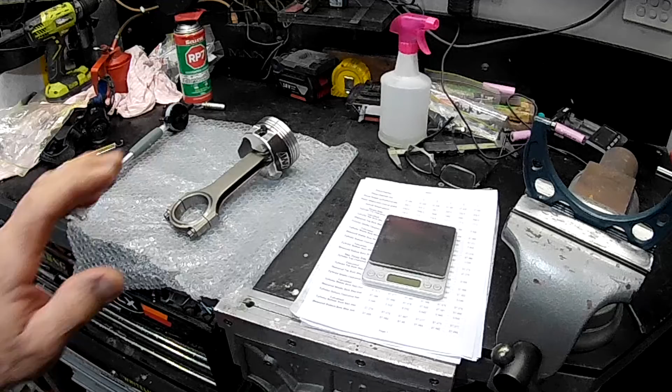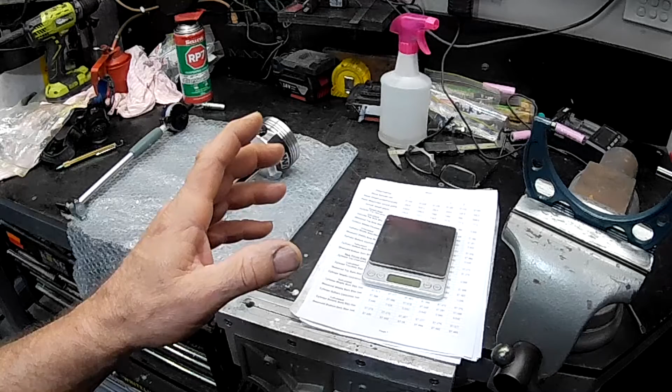Today I'd like to talk to you guys about measurements, specifically measurements you need to take in the engine block when embarking on a rebuild or refresh, which will help you know where you are with things, what parts you'll need, and how you'll progress with your rebuild. I'm going to show you how to draw yourself a map using numbers and calculations to get the exact size and shape of all your cylinder bores and pistons, work out the clearances, whether you can reuse your pistons, whether you need to get your engine rebored with new pistons, or whether you can just hone the block and fit new rings.

But to do any of that, you need to know all of that sizing and have a record of it. A lot of people don't bother doing this, they just hand it off to a machine shop and go in blind, saying 'oh, whatever you reckon.' But as I try to push people on my channel, it's all about learning, teaching yourself how to do stuff, even basic stuff. We've all got to start somewhere, and you can progress to more technical things later as you get more used to it. It's good to know exactly what's going on with what you're doing and where you're spending your money, and to formulate your own plans rather than relying on someone else to tell you what you need to do.

And to do all that, you need knowledge. And to get that knowledge, you need information. And this is where I come in. I'll show you guys how to do all this sort of stuff.

So with me particularly, with this engine that I've pulled out of the Fairlady, it was a used engine, supposedly low kilometres. It was a built motor that supposedly had a lot of money put into it. There are a lot of promises with this engine, and some of it I can't complain about, honestly. It's really not that bad. It certainly could be better, but it's certainly not the end of the world either.

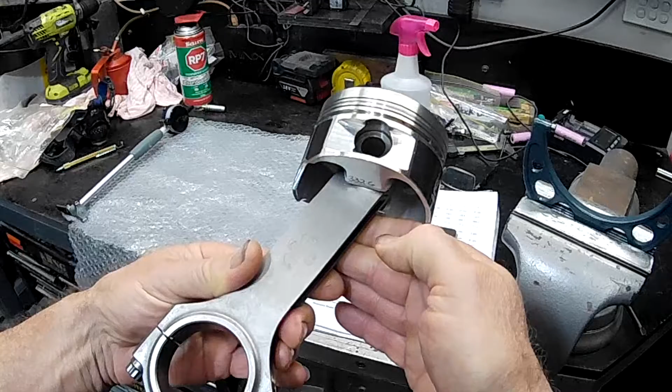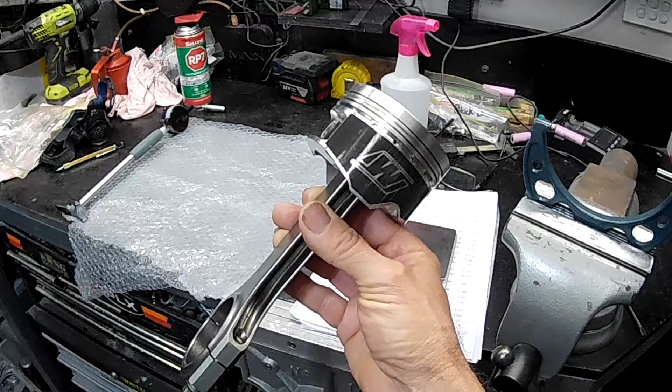So the first thing we need to do is know the size of our existing pistons. This is the piston and rod combination I pulled out of this engine. You can see they're Wiseco forged pistons, Eagle rods, a nice little unit, nice little setup. A rough measure of the cylinder bores tells me they're 87.5 mil, just taken with a set of vernier calipers. Standard bore size is 87, I think. So obviously the engine block's been bored, and these pistons bought for it and set up.

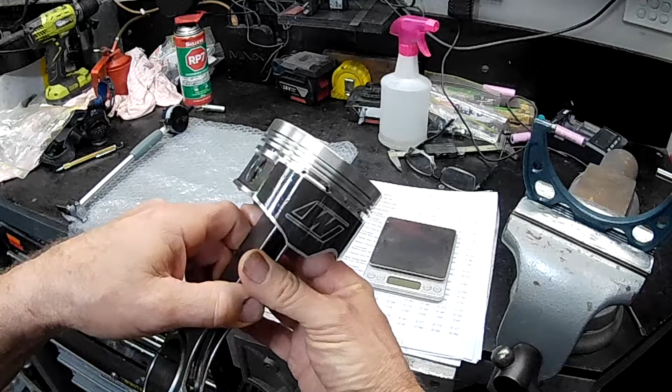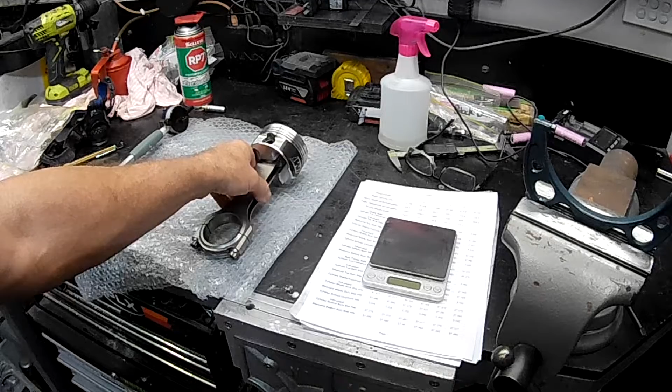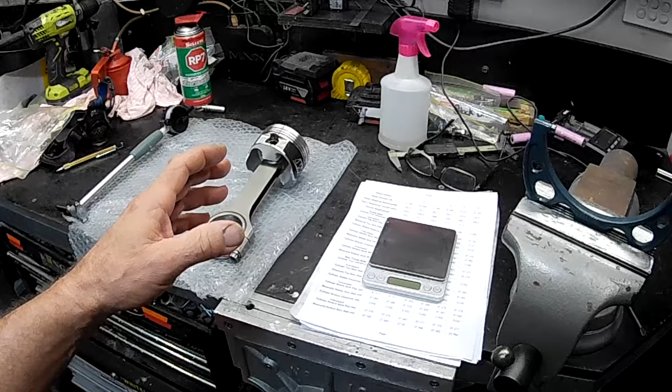But the engine has done some miles. From what I've been told, that's about 10,000 kilometres, but I don't really hold any faith in what I've been told, just because there's been so many anomalies with all the information I've received about this engine. Upon tearing the bottom end down, I did notice some very light scoring on some of the cylinder walls on the thrust sides of the cylinders on the banks. I'd like to be sure they can be honed out and that there's enough meat left in the cylinder walls to properly hone the block, get the right hone finish, and not open the block up too much. I've got a feeling the block is actually a bit tight anyway, but the only way I'm going to know is if I accurately measure everything.

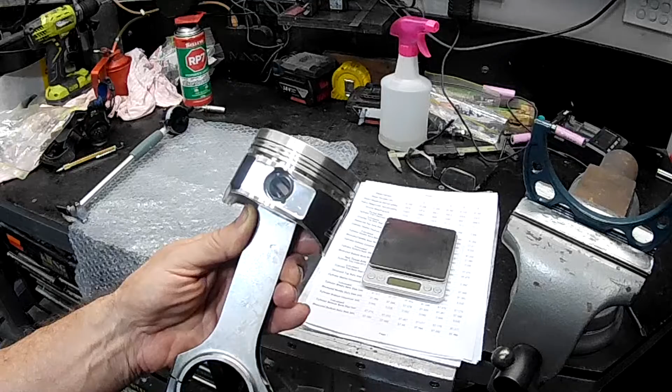So the first thing we have to do is measure our pistons that we've pulled out. As I say, these are for an 87.5mm bore, which is roughly what the bore measures with a set of verniers. But we need to know the exact size of these pistons, and we also need to know how much clearance the manufacturer specifies between the piston and the wall of the cylinder bores.

Now these Wiseco pistons, the manufacturer recommends that they are to be measured 90 degrees off the pin face. So here, on this lower area, right down there on either side - that's our width. Of course these pistons do taper out slightly at the bottom, and that's the width we use to make all of our calculations with.

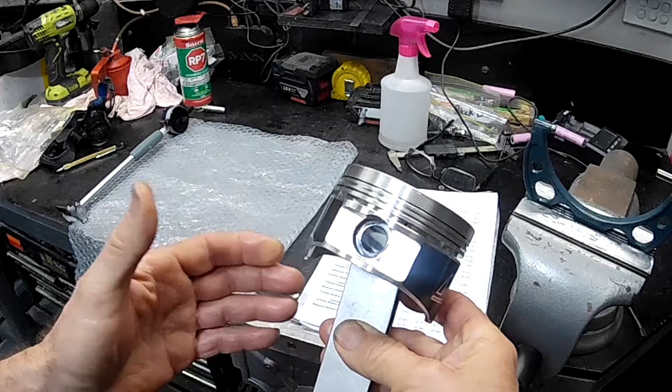So the very first thing we need to do is mark. See, this is piston number 1. We need to mark and measure all of the pistons so that we know exactly how big each piston is, because you can get some variation, particularly in factory pistons. I've already measured these pistons - they are all exactly the same, but for the purpose of this video I'll show you guys how we go about doing that.

So what I have over here in the vise is a micrometer. Now this is, I think, a 75 to 100 micrometer. Micrometers come in various sizes for measuring different things. This is only a fairly cheap micrometer. I have checked it to make sure that it is accurate. Currently it is accurate, but the measurement isn't really the important side of this anyway. You can actually use a micrometer with a broken dial if you want, I guess, because the measurement isn't the most accurate thing.

Obviously it's good to know, but really what we're going to be working out here is the clearance between the piston and the cylinder wall. But obviously it's good to know the working measurements. So this is how we go about doing this.

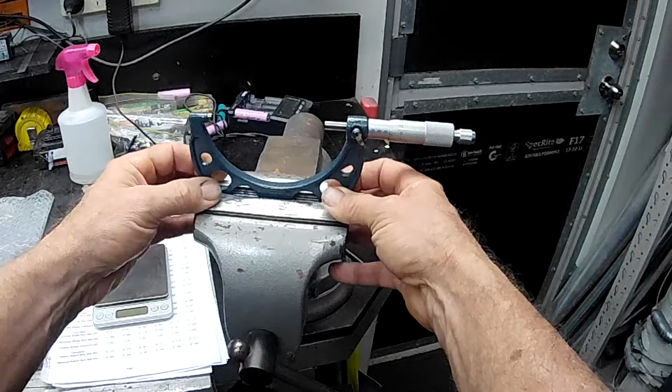So it's always good to mount your micrometer in something. Currently I have this micrometer mounted in a set of soft jaws, only very lightly in one of my vices. You have to be super light with these, because mounting it, you can actually distort the micrometer, distort your measurements, particularly with a cheap micrometer like this one. You have to be very, very careful.

Mount it just as lightly as possible, so that it's just going to stay there. I actually have a set of rubber jaws that I often use for things like this, but as I say, I am being very, very careful. And the reason for that is because you need to really take both hands to do this.

You need to control the piston, and you also need to be able to crank your micrometer. So when you use the micrometer, always use the ratchet. I'll just wind this up. They have a ratchet on the end - hear that? So that always gives you a consistent amount of pressure when you are turning the measuring part in, so you don't over torque things when you're doing it.

In a situation like this, it'll take a few goes before you've got it in the right spot. You've got to move it in and out, and try and get it situated as best as you can, so that you have it in a spot where it's firm, but yet you can move it in all directions so that you know you're in the right spot. Otherwise, if you don't have it situated correctly, it'll be either tight in there, you won't be able to move it around, or it'll be too loose.

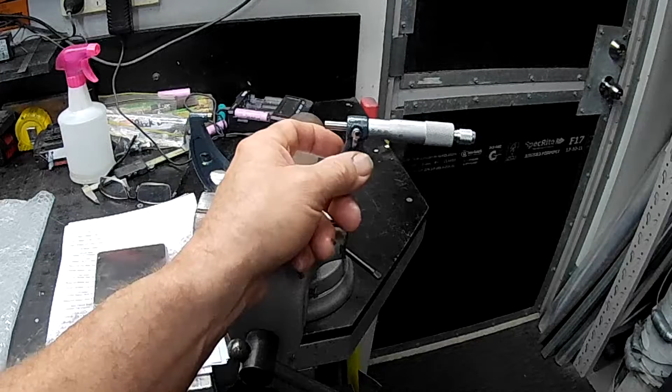Take your piston out, write the measurement down with the corresponding number of the piston, then move on to the next one. And once you have all 6 pistons done, you can then start the process of going through the cylinder bores. Now, all these pistons are exactly the same size - I've already measured them. They're all 87.435. So I can lock this off right now by turning the little handle that way, like so. Lock that off. And then we can move on to the next step.

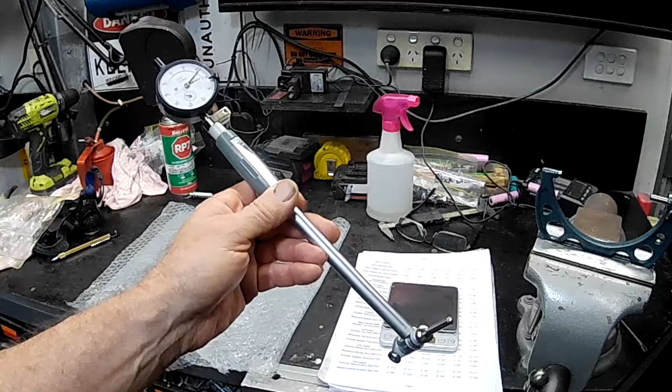So this is the next tool we'll be using, guys - this is a bore gauge. Now you can buy these pretty cheaply on eBay and Amazon. And what I'll do, I'll leave a link in the description to a bore gauge and a cheap set of micrometers, just to help you guys out.

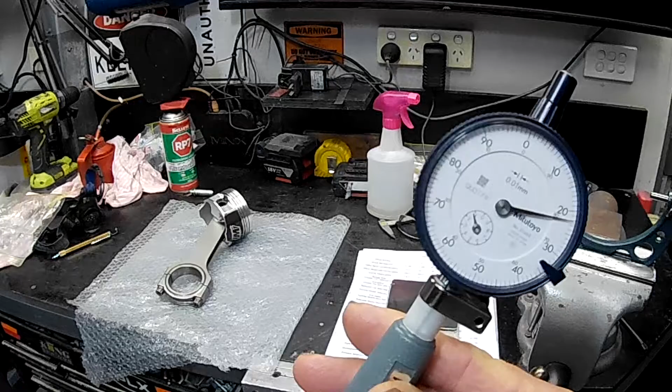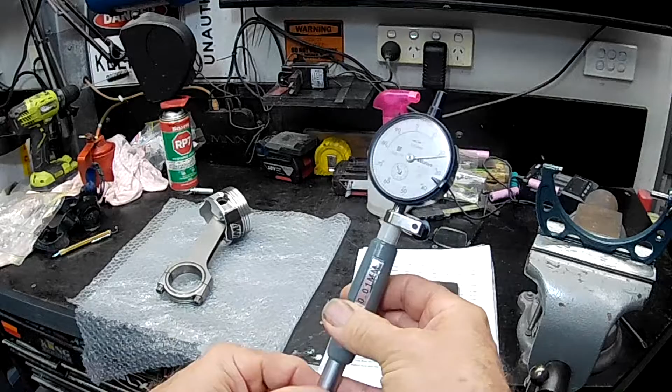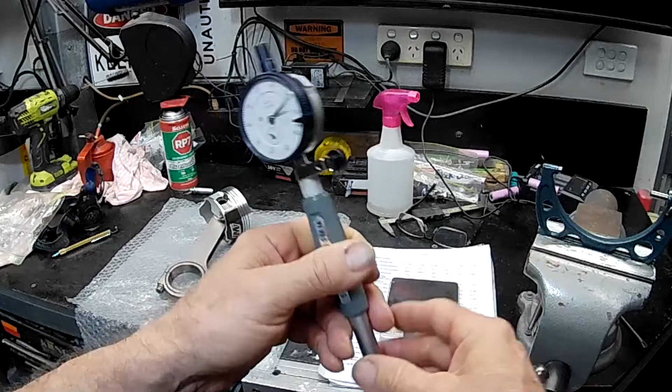So really they are the accuracy part of the whole setup. The bottom is just a pivoting thing that pushes the rod up into the dial indicator, and the dial indicator is where all the accuracy is. These things come with a pretty cheap and nasty dial indicator, so you can see I've got one of my Mitutoyo dial indicators on there. This thing is now incredibly accurate. It works really well because it's just a simple mechanical device. All the accuracy is in the dial indicator on top.

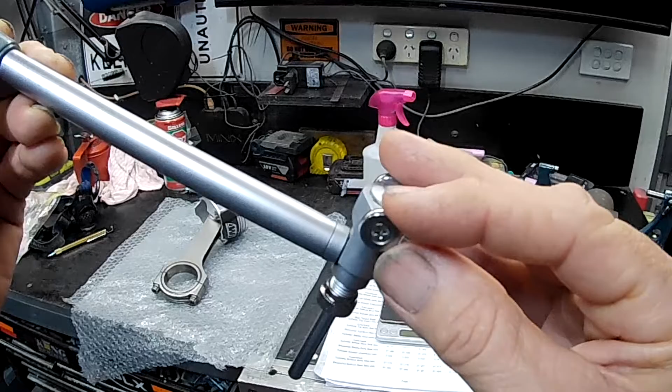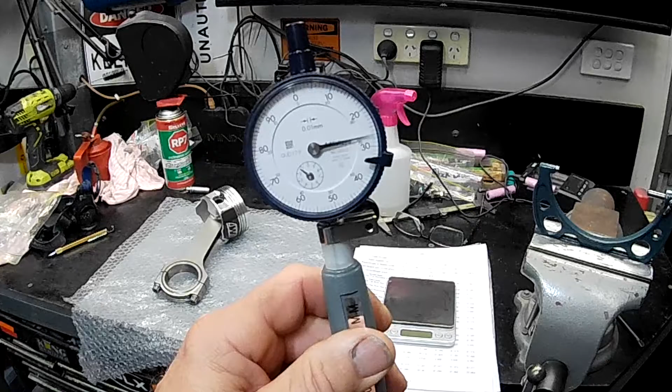These come with different attachments to work with different sizes. I think this set measures bore sizes from 50 to 160 mil. This is the piece on the back that makes it work, and it just pushes in and out - only a very little bit of movement, which is why you have these adjusters. These are little spacers that help position it properly in the bore so there's no wobbliness. I'll just push the bottom with my finger, and you can see what that does when I push that little button in.

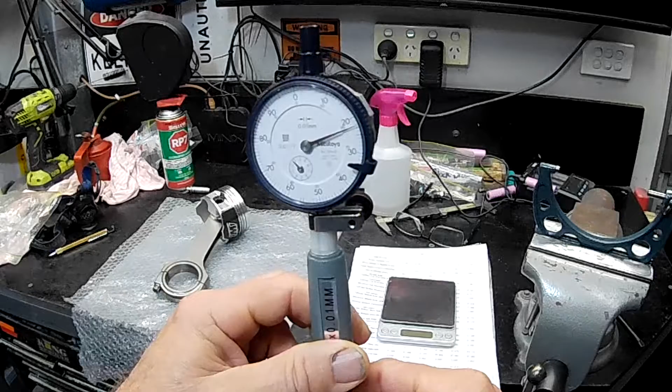It just moves the dial indicator. So as you move this into the bore and position it, it will give you the measurement of the cylinder bore. Okay, so how do we set this up?

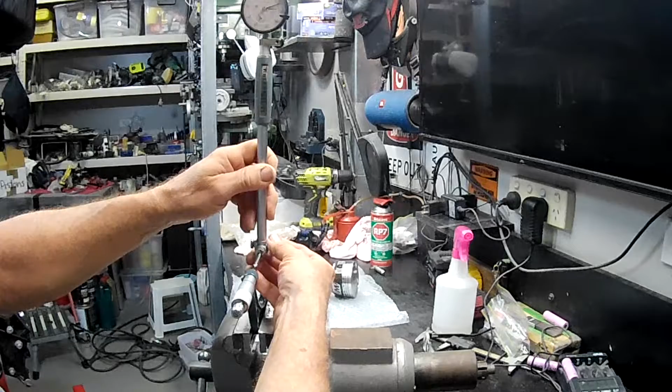Now that we've got our micrometer positioned over here in the vise, we use that to set up the dial indicator in the bore gauge. So with our micrometer positioned firmly, we now want to set up the bore gauge.

Now this takes a little bit of finesse, guys. This is a bit awkward for me because I have the camera right there - I can't bounce around like I normally would. So what you have to do, you can see as I'm moving this around, it's moving.

So what I generally do is set the dial gauge onto 0, double check by making sure this is positioned exactly on the anvils, and then just go up and down. You can see I'm getting a little bit of movement there - it'll peak and then go back the other way. So take a while doing this, guys. This kind of stuff takes lots of time because you are working with really high accuracy, so don't be afraid to take your time. It's all about chilling out, just taking time and getting this right.

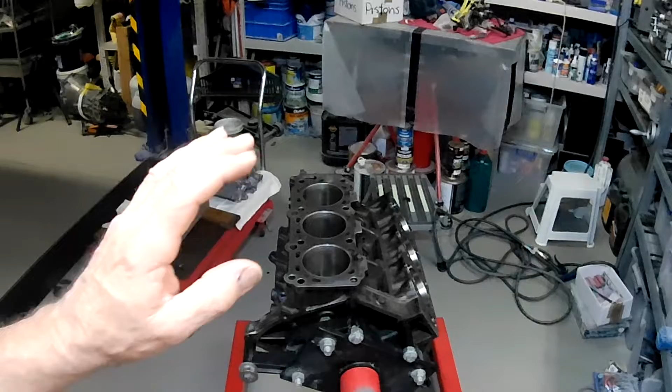So I'm pretty confident that I have my bore gauge now set to 0 on the micrometer. Alright, we can now take that off there. I'll just put this down over here for a second, carefully, so we don't disturb it. We have to be very careful with everything. And sitting just over here is our cylinder block.

So with each cylinder we need to take 6 measurements. What we're working with is measurements that are 90 degrees to each other. We need to take measurements across the cylinder bore in 3 positions: at the top, about 10 mil down just below the ring height, the center of the bore, and the bottom of the bore, just where the ring wear stops, just below that or just above that, or right on it.

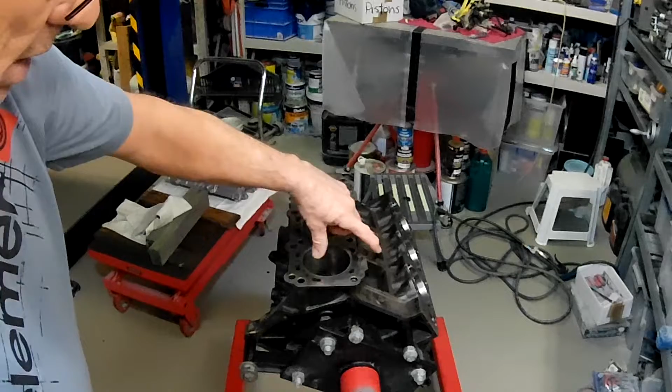Depends on where you want to take it. So you want to take 3 measurements down that way, and that's called the thrust side, because your crankshaft spins this way, so you've got thrust acting on your pistons, which are then acting on your cylinder bore. Then you've got 90 degrees off that, which is the non-thrust direction, forwards and backwards with the engine - there is no thrust in that way. So you've got thrust and non-thrust. You also want to take 3 measurements in the non-thrust direction: top, middle, and bottom. And you need to write all of those measurements down.

Personally, for myself, I actually take another 6 set of measurements as well, from a different perspective. So I'll show you my sheet that I've knocked up over here on the computer - it's just a spreadsheet I've put together, but I'll give you a look at that.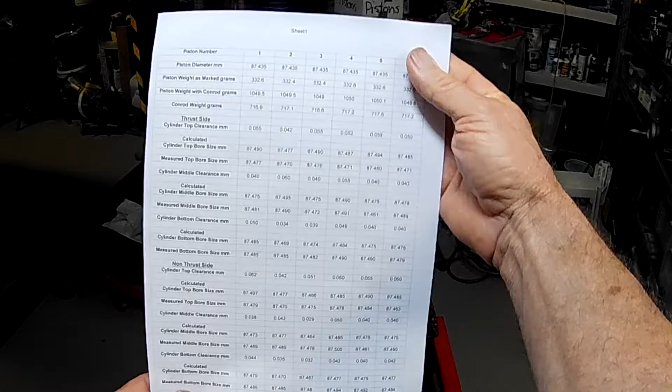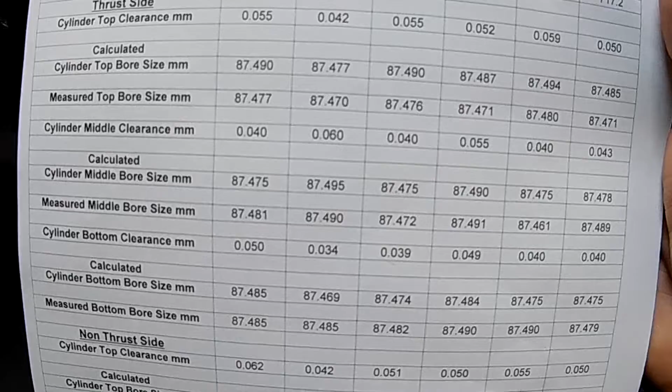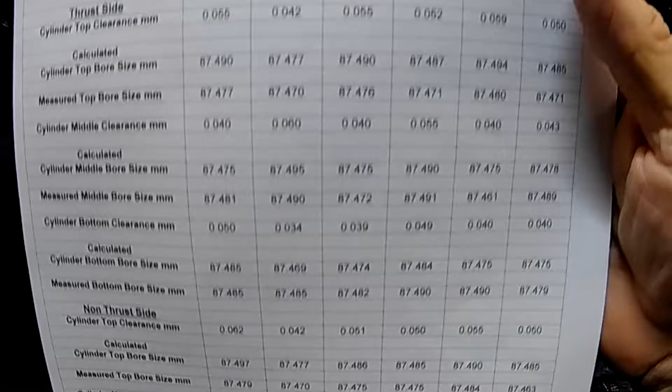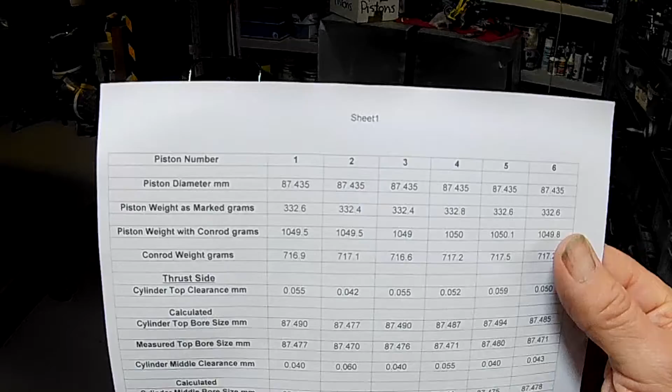Alright, so I don't know if you guys can see that - oh, I reckon you probably can. Coming closer so you can stop it and pause it if you want, and I'll scroll up slowly so you can see everything that's on there. Alright, so this sheet gives me a full map of the pistons and bore sizes that I currently am working on this engine. I also have here the weights, because I have been weighing the pistons as I do them. You probably saw there is a little scale sitting over here on the bench.

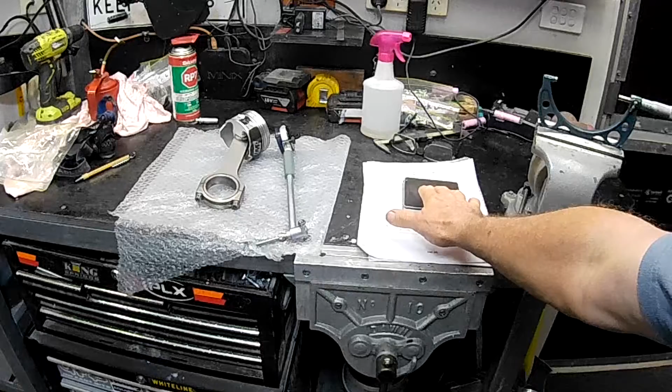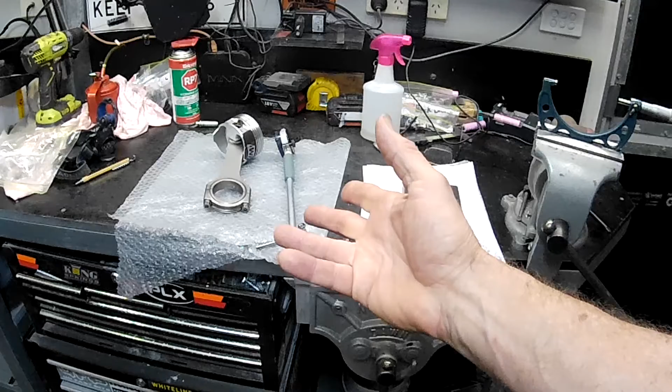So each piston and rod combination gets weighed as I'm doing them. Normally you'd weigh the pistons and rods separately, but they're already attached together. The pistons have markings on them from the factory, I think, or from the previous engine build, which has the weight of each piston. So I can easily get the weight of the piston from the markings, get a total weight with a scale, do a calculation, get the weight of the rod, and check how well the piston and rod assemblies were put together as far as balancing goes, and how well they're matched. So you'll see here what I've done.

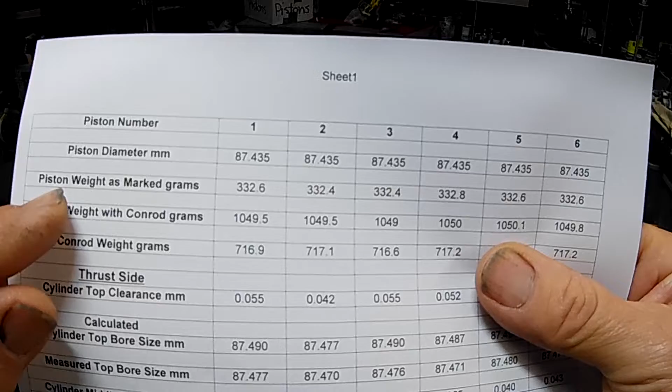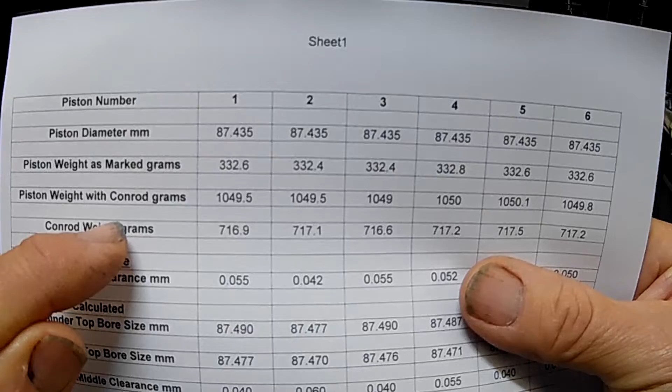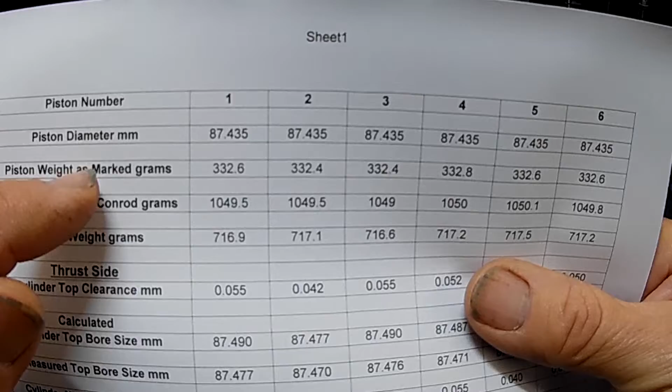So here you can see I've got piston weight as marked in grams, 1 through 6. Piston weight with conrod in grams down here, 1 through 6, and then I've got conrod weight in grams. That's just a calculation of the overall weight minus the weight that's marked on the pistons. That tells me how well they were put together, and if there are any improvements to be made by swapping any of the rods around.

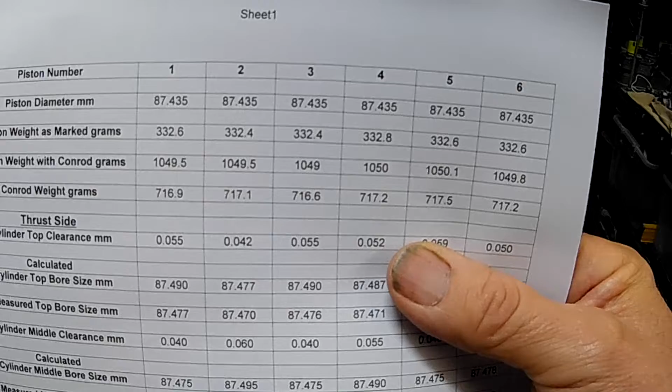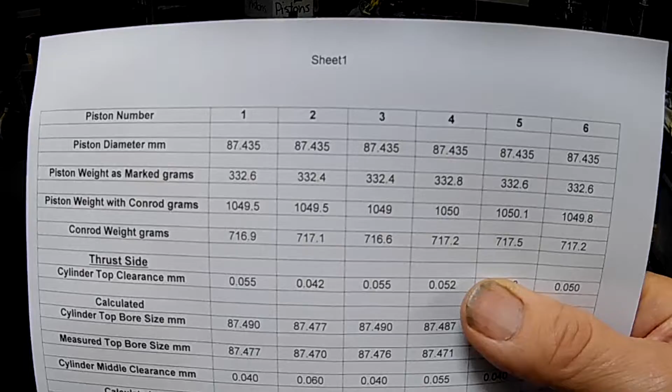Normally you'd do that with the components individually, but in this situation they're already together. So that's just what I've got while I'm here. I may actually separate them and reweigh them later on in the stage, but for now that's all I'm doing with them. So you can see the measurements that I've got here.

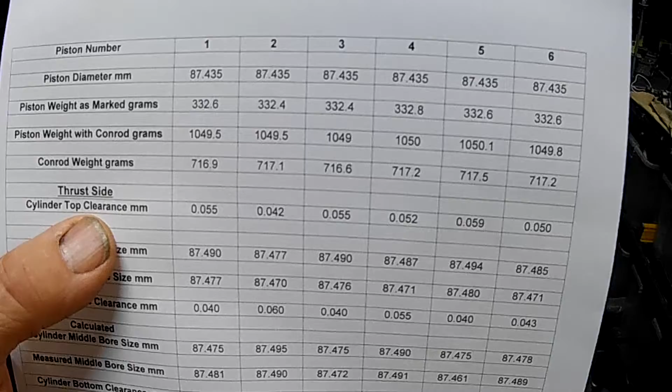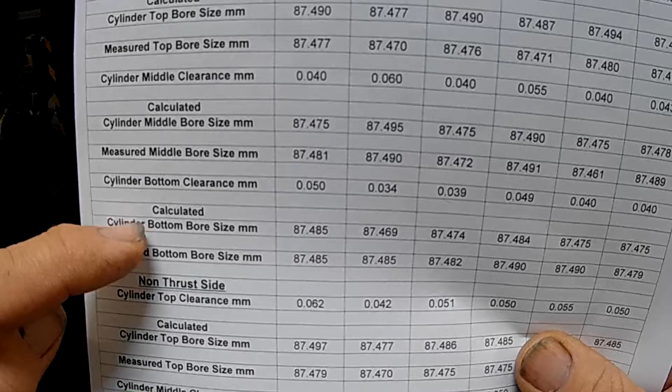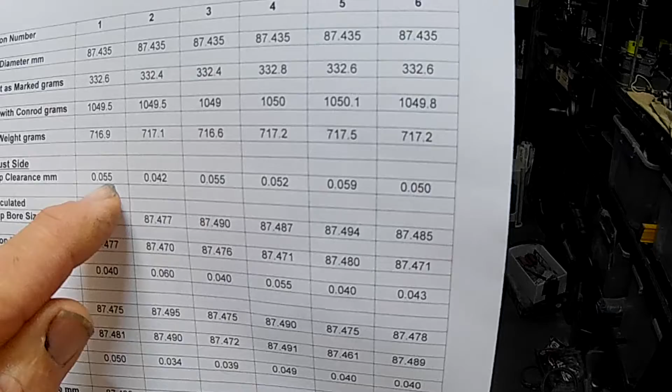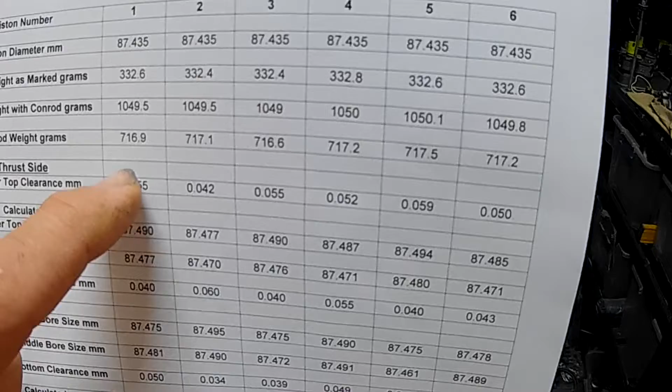So this first line here, obviously I've started measuring on the thrust side. My thrust side measurements go all the way down to here where we say non-thrust side. So this is cylinders 1 through 6 on the thrust side, and these are the measurements that have been made. We have cylinder top clearance in millimeters for each piston or each cylinder. Then we have the calculated cylinder top bore size. That number is achieved by adding this amount to our piston diameter, which gives me the cylinder bore size in millimeters in that position.

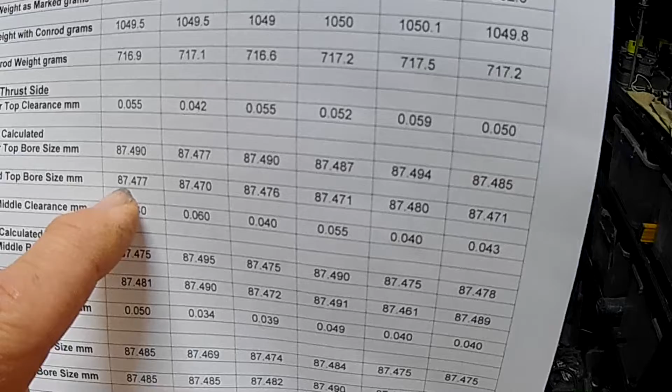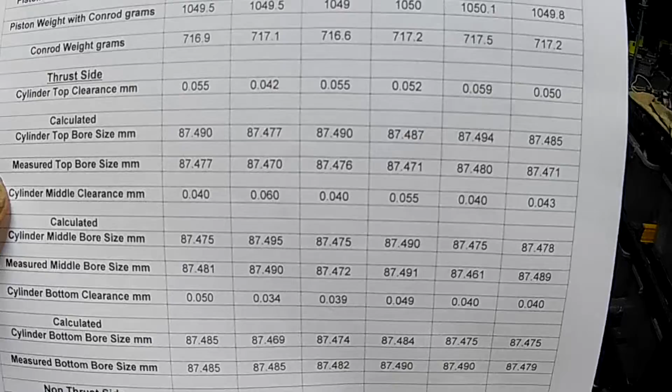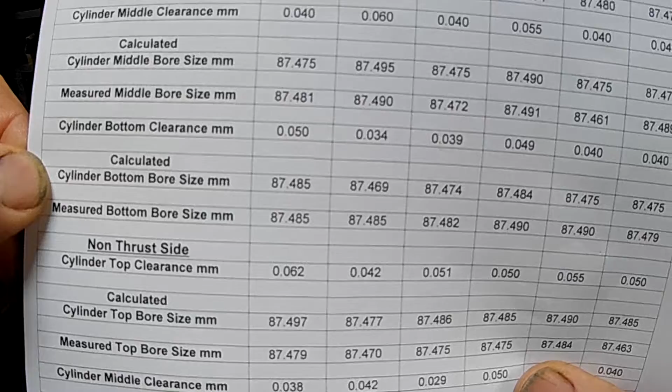So we've got 1 through 6, and then I've actually been through them all again. We'll disregard that one for now because that might confuse you guys a little bit. So we've got the middle clearance in the cylinder again on the thrust side, and then again we've got that calculated bore size in millimeters in the middle. Then we've got the bottom clearance in millimeters, the calculated bore size in millimeters, and then we've got the same thing on the non-thrust side.

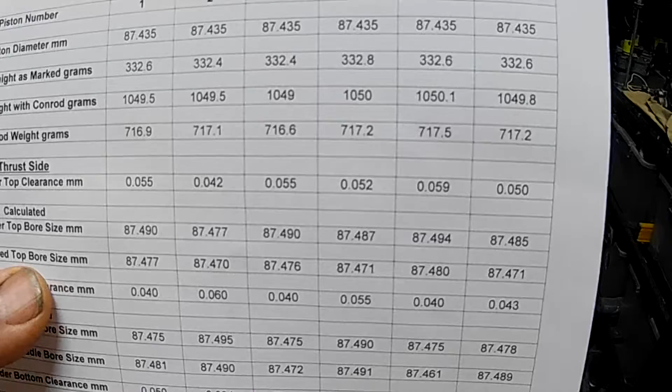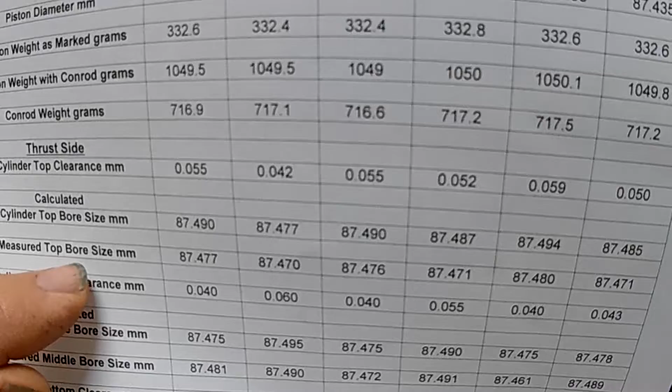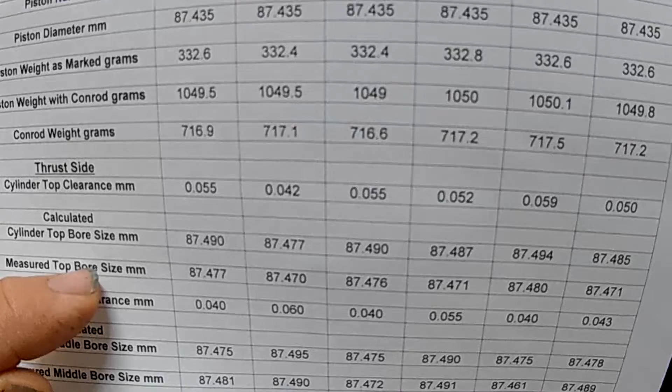Now this extra measurement that I've sort of skipped over, that's a measured top bore size in millimeters. How I've measured this bore size is where it says measured bore size, compared to calculated bore size. How I've achieved that is I've set the micrometer to 87.5, which is the specified bore size for these pistons. I've then set the dial gauge up to that, and checked that in the cylinder bores. That tells me how much smaller the cylinder bore is than 87.5 millimeters, and I've then subtracted the size of the pistons.

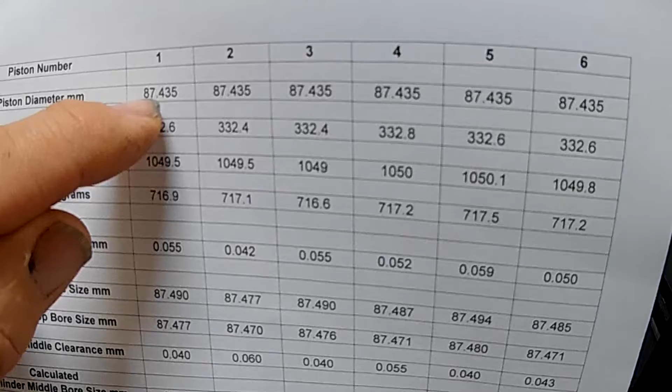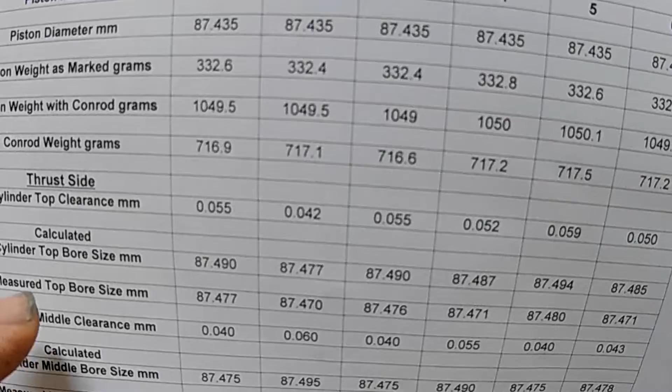I've then added the size of the pistons to that amount. So that's given me a measured bore size as opposed to a calculated bore size from the previous set of calculations. Basically, it's just a way of double checking the calculations that I've already made.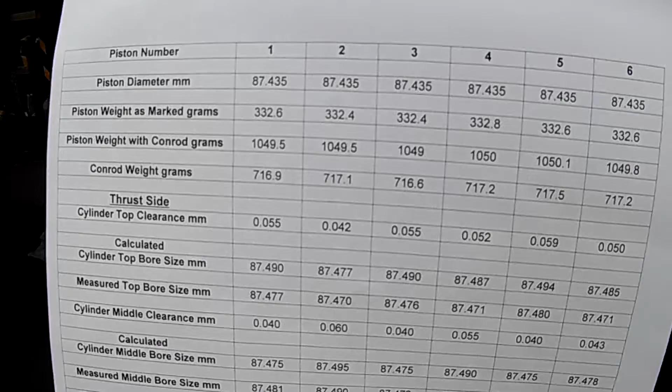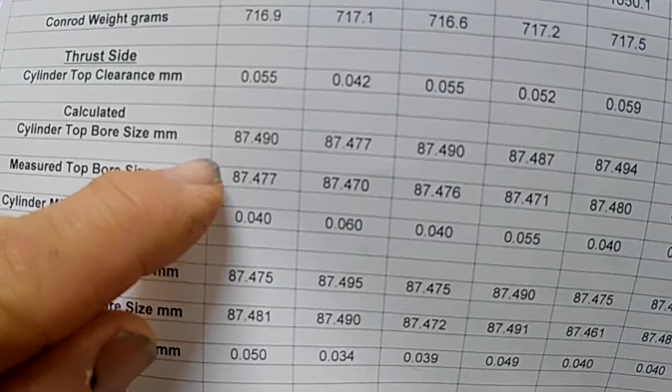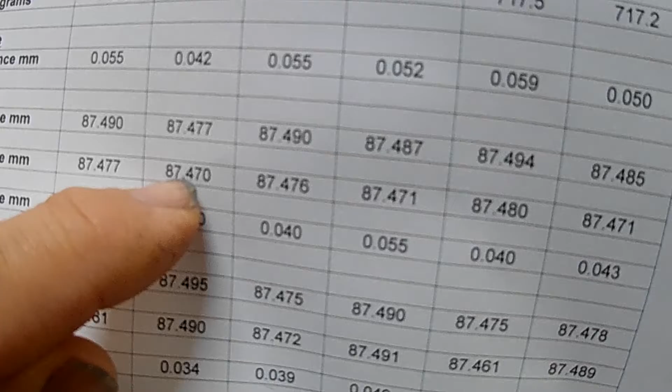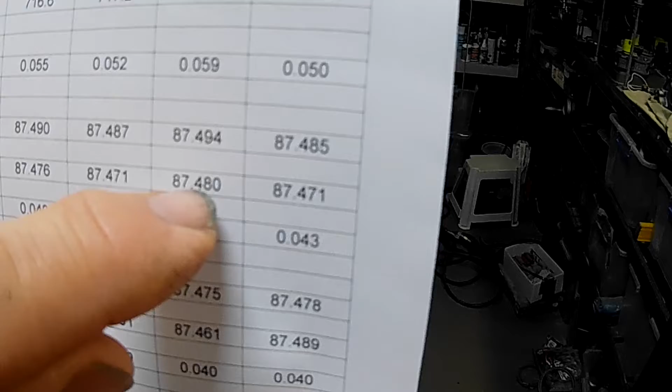And I have got some discrepancies between them, as you can see here. We'll just keep working with these top ones. So here you go, this is cylinder 1, so that's the calculated size of the bore at the top in cylinder 1 from our first set of measurements, and that's from the measured set of measurements. So you got 87.49 compared to 87.477, and you can see as they all go across, they all vary. Some of them are very close, well, they're all very close, but some of them vary more than others. So there is some error in my measuring that I'm picking up here and there. They're only generally in the hundredths of a millimeter.

So it's not a whole heap to worry about. But basically all of these measurements I'm taking are really only preliminary measurements anyway. They're not for machining purposes, they're only for myself, so I can constantly refer back to these numbers as far as making any decisions about what I'm doing with the engine, what parts I need, how I'm moving forward, etc. So the purpose of taking these measurements for me was to tell me whether I can reuse these pistons, whether there is enough meat left in these bores so that I can just rehone them, or whether I would need to rebore the block and go up to the next size piston.

So how do we do these measurements? I'll just reset up the camera and we'll have a bit of a look.

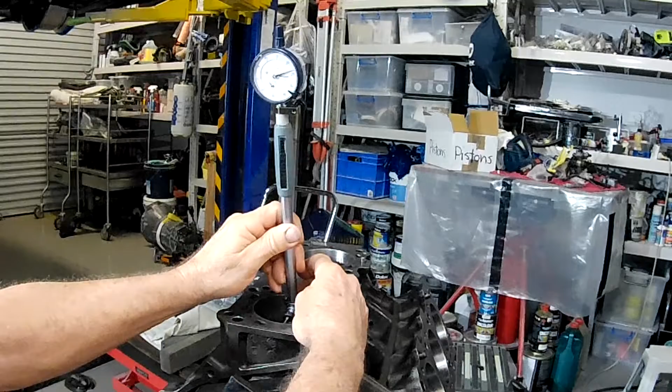Alright guys, so if you haven't used a bore gauge before, this is what you do. You position it in the bore in the place where you need the measurement. So this first measurement I'm doing here, this is cylinder... where are we? We're on the back of the block here, so that's cylinder number 6. You've lots of things to remember, guys.

That's the only thing about this. It's very easy to lose your place and bugger stuff up. Don't for a minute think that this is super easy stuff to do, and if you're struggling with it, don't be hard on yourself, because it is quite tricky. There is just lots of finesse about it, and even once you've been through it and completed all this and things just don't seem to add up, don't discount the fact that you could have just completely buggered it all up, no matter how much care you thought you'd taken.

But you will get better at it very, very quickly. And if taking precise measurements isn't something you're used to doing, it will take a little bit of time to get good at it, to get your hand in. It's just one of those things, and even when you initially start doing it, you will kind of feel that you're going really good until things just don't really add up at the end, and then you'll realize that you are possibly not doing things 100% accurately.

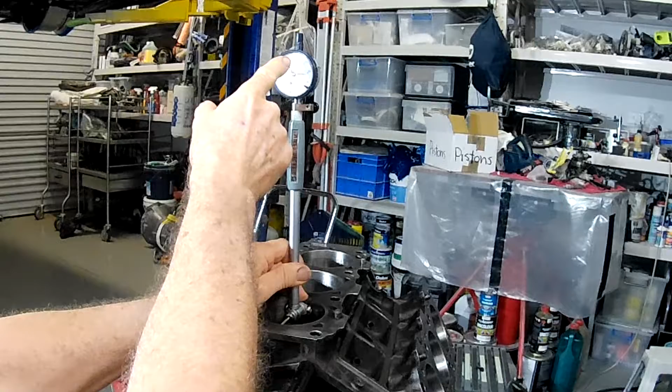So we want to know this distance across the top here. We have our bore gauge set up to the size of one of the pistons, and when we fit it in the cylinder bore, this will show us how much clearance there is. If you remember, the gauge was set on 0 when we were on the micrometer at the top. Basically what we have to do is rock the micrometer forwards and backwards, and the dial will peak and then drop off. So as we go forward, if we go past the point where it peaks, it will actually drop off. We come back the other way, it'll hit that peak and drop off again. That peak is our measurement that we're after.

This dial indicator has increments of 0.01 millimeters, and we are 9 of those increments away from our 0 mark. So what we do is we write down 0.09 in our notes, and then we move on to either the next cylinder or the next position, depending on how we are going through and tabulating these measurements.

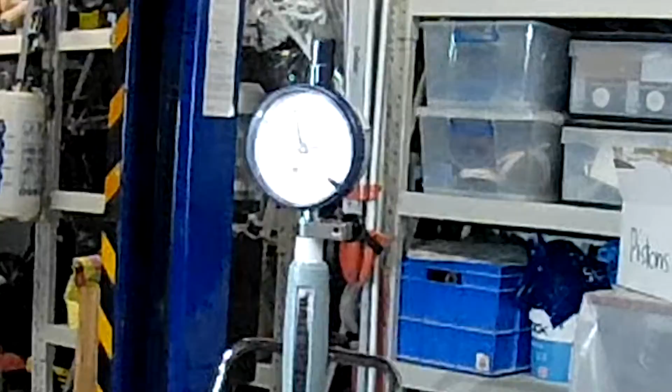So if we're going to continue on this cylinder, measuring in the non-thrust direction, we now drop down to the middle of the cylinder and do the same thing again. We go forward until it stops and starts to go back down, then pull it back the other way and keep rocking it till we find that high spot. You can see there that's about 6.5 increments back from 0, so I would write down 0.065 for that measurement. Then from there we go down to the bottom of the bore.

I just use my fingers underneath to feel about 15-20 mil from the bottom of the bore, but always make sure you measure about the same distance down on every cylinder every single time. Again, same deal, rock it forwards and backwards. We go forwards until it drops away, go back until it drops away. So that's just over, slightly over 6 increments away from 0. So we'll call that 0.062 millimeters, and we will write that down.

So that's how you take your measurements. As I say, it does take a little bit of finessing to be able to repeatedly take these measurements, and you'll know once you get the hang of it. I haven't done this myself in quite a while, quite a number of years actually, and it took me a little while to get a bit of match fitness back up before I was confident that I was actually measuring things accurately. And I have done quite a lot of this in my life.

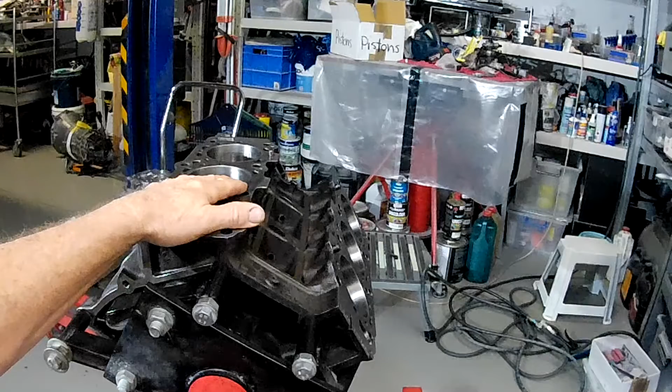So if you're doing it for the first time, I can't stress enough, just take it easy, and you may have to redo all these measurements quite a few times until you find that you are getting consistency and are quite comfortable with it. The best thing to do is go through, make all the measurements, write them all down, and then put that paper to one side, and then do the whole lot again, and then compare them.

If you do not have consistent measurements, then there is something you are doing wrong - whether it's in your initial setup of your micrometer in relation to either the pistons or how the micrometer is set up with the bore gauge, or whether it's due to how you're actually measuring your cylinders. Until you can repeatedly get the same measurements out of those cylinders after going through it a few times, you know you're not on the money. But you'll know as soon as you are - it'll become quite apparent that you can reproduce those same measurements time and time again, no matter how much you skip between cylinders.

So you go through and measure 3 spots in this direction, which is the non-thrust direction, and measure each cylinder in this direction, which is your thrust direction - 1, 2, 3. Write them all down, move on to the next cylinder, or do all the tops, all the middles, all the bottoms, one bank - however you want to do it, however you feel comfortable measuring. You need to get yourself in a good position to actually do this, or that's going to come back and bite you. You're just not going to be happy.

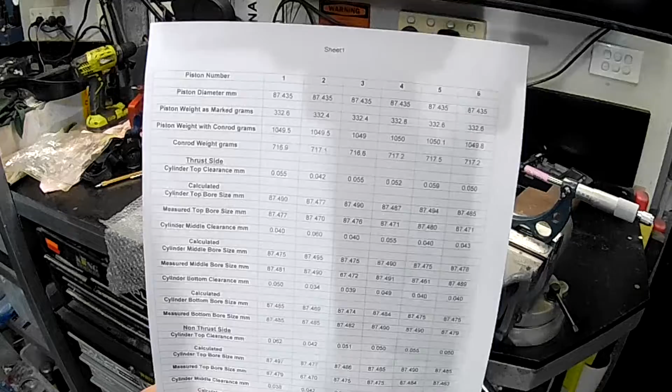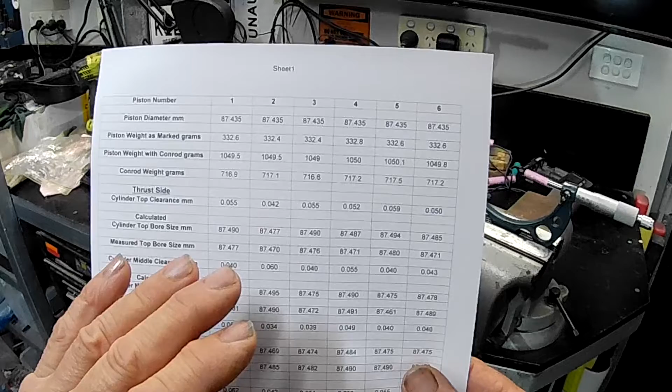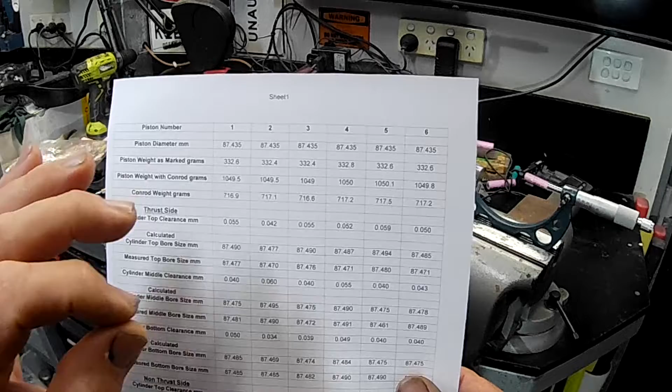So at the end of it, this is what you'll end up with - something like this. And as I mentioned about repeatability and accuracy, I still have slight variances between my final calculated clearance and bore sizes and my measured cylinder bore sizes that I did right at the end, although it's only a very minute difference, and I've done them over and over again a few times.

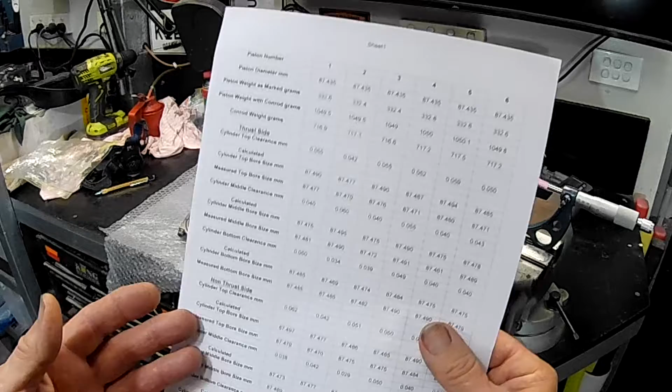As I alluded to before, these aren't for machining purposes or anything, it's just for myself so I know what I'm dealing with. What I've been able to work out from those measurements is that the cylinder block is fine - there's enough meat left on it to re-hone it, and it'll still be in spec for those 87.5mm pistons. It appears to me, if my measurements are accurate enough, that the block was honed slightly undersized anyway, and that's the reason for that bit of scuffing on a couple of the cylinders, because those cylinders with the scuffing are the tightest cylinders going by my measurements. Typically that's sort of what you'll get.

I am going to be putting more boost through this engine than it was possibly set up for, because things like cylinder size are dependent on cylinder pressures and expansion rate of your piston. So the more boost you run, the hotter your pistons get, the more they're going to expand, so the more clearance you need in your cylinders. So I will set this engine up with a little bit more clearance than you would with the factory spec for a low boost setting.

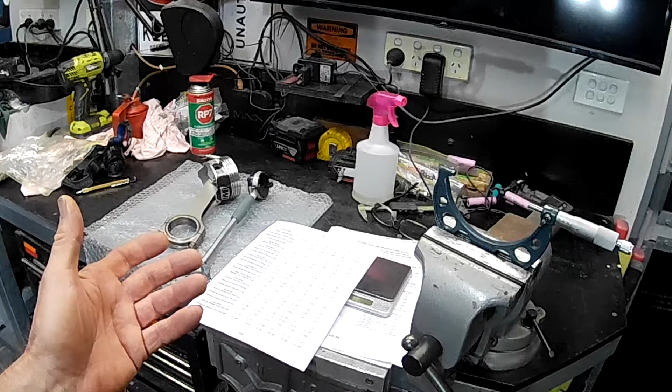For example, if you're setting it to run up to about 15 psi, you have to add a certain amount of clearance on top of the factory recommended clearance. All these specifications and clearance amounts are available from your piston manufacturer - in my case it's Wiseco - and they also have specs for say, running 30 pound boost, telling you how much more clearance you need if you're running nitrous, if it's a track car, whatever, and that all relates back to how much heat's going into the pistons. Being that they're forged pistons, they do expand with heat, so you need to adjust your clearances to suit.

So I'm confident I have enough room in the cylinders to hone them back out, to fix up all the anomalies that are in the cylinders, because they do have wear on the top of all the cylinders, which is usually where you will have wear. The centers and the bottoms will generally be the best, and the top's usually where you'll show wear. From the measurements you can actually get the actual shape of the cylinder on those two axes, the thrust side and the non-thrust side - you can tell whether the cylinders taper, or whether they're dead straight, or whether they flare out, all from your measurements.

And at least I have something now that I can take with me when I approach a machine shop about doing work on this cylinder block. They'll obviously probably want the pistons too.